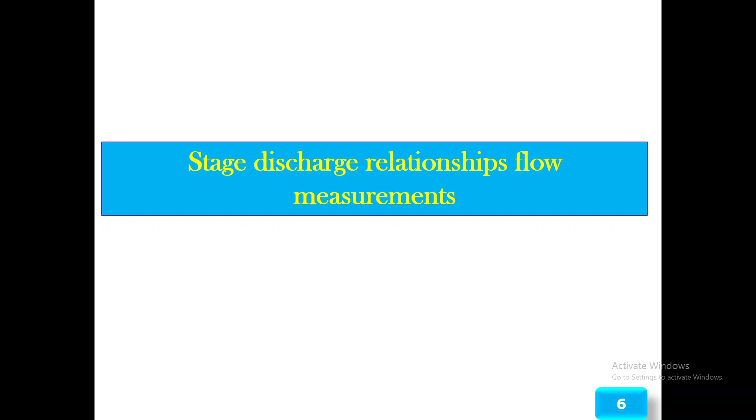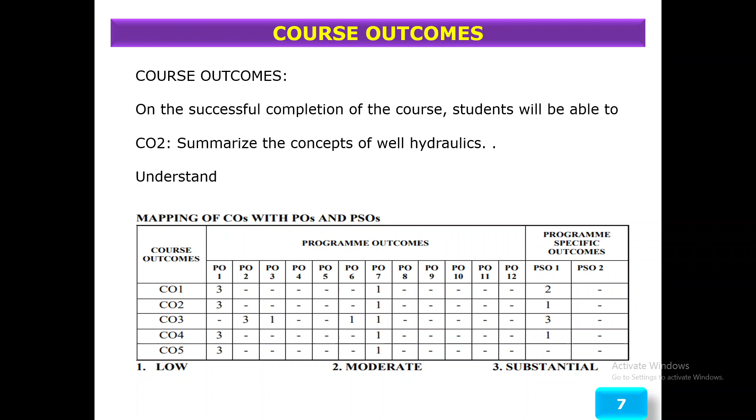Rainfall has an effect on stream flow, and hydraulics tends to measure the relationship between rainfall and stream flow. The aim of measuring stream flow is mainly establishing a stage discharge relationship.

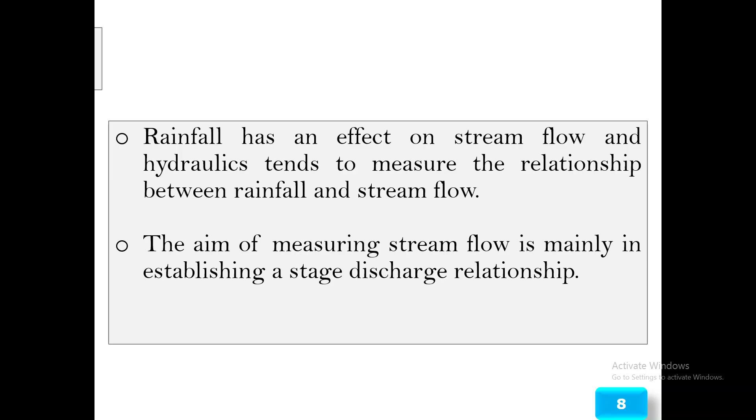Rainfall results in infiltration I, evaporation E and evapotranspiration ET, intercepted and depression storage, surface flow Q, and QG and interflow goes to the stream. The stream will flow in the channel and basin watershed. We can see water stage measurements and water surface elevation.

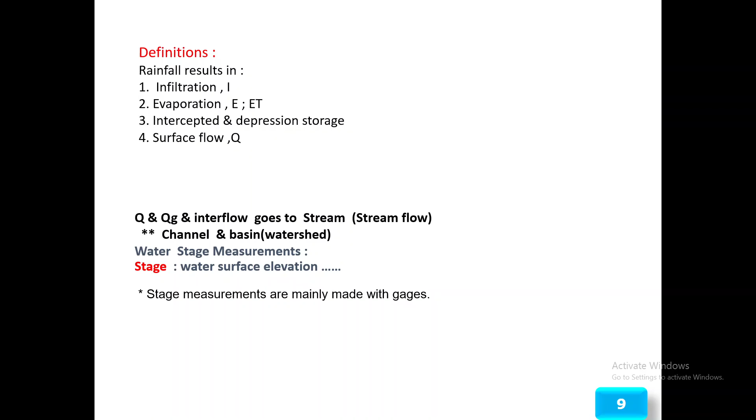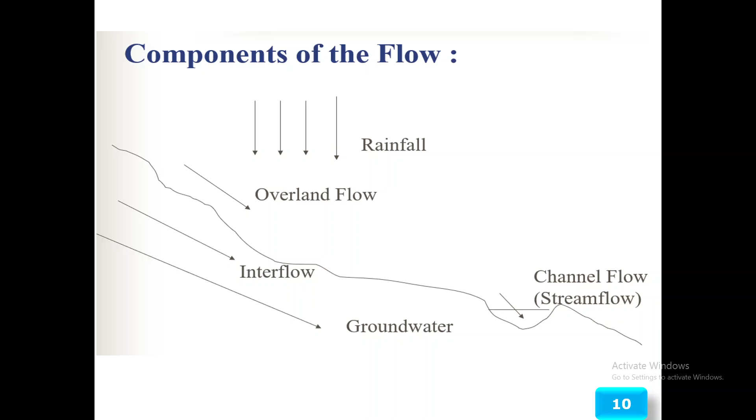Stage measurements are mainly made with gauges. The components of flow are rainfall, then overland flow and interflow, then groundwater, then channel flow in the stream.

The stage discharge relationship: the simultaneous measurement of stage and discharge provides a calibration graph known as stage discharge relation, or rating curve. The stage is the height of stream level measured from an arbitrary datum.

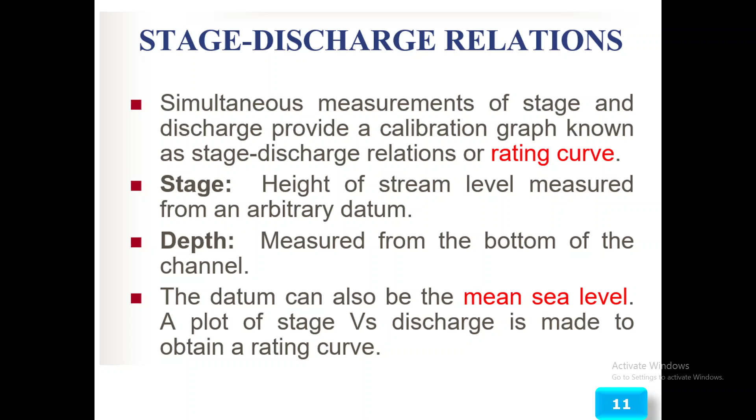The depth is measured from the bottom of the channel. The datum can also be the mean sea level. A plot of stage versus discharge is made to obtain a rating curve.

For the stage discharge relationship, the methods include non-recording stage gauges like staff, wire, string, crest gauges, and recording stream gauges like float type and digital gauges.

Manual gauges are non-recording stage gauges, such as sectional staff gauges - a series of posts, each overlapping, where the height above a certain datum is measured. The stage is usually related to height above mean sea level, MSL.

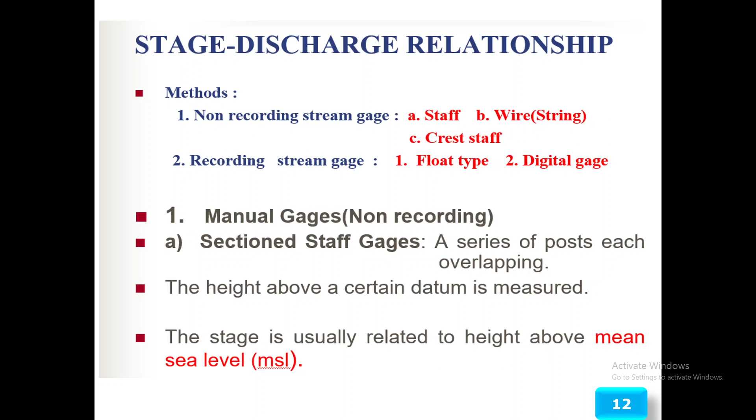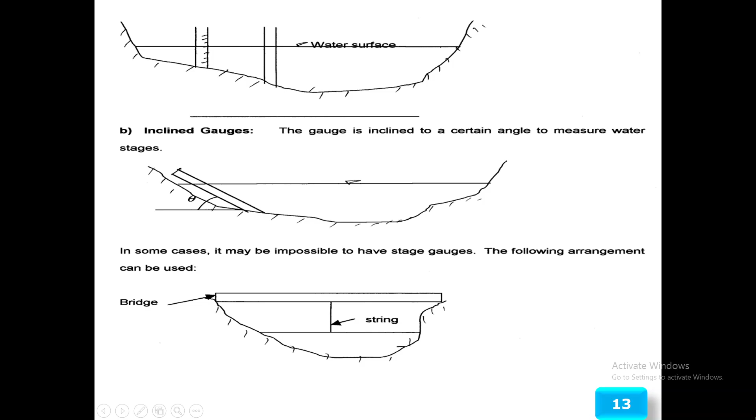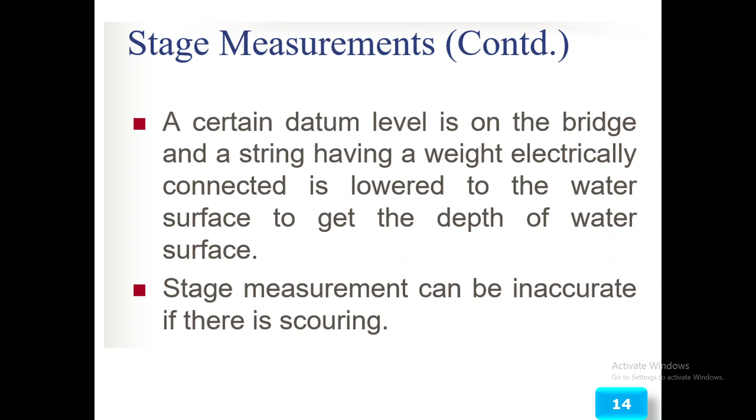The stage measurement can be inaccurate if there is scouring. So here are the rules guiding location of gauges: the gauge should not be located in rivers with scouring characteristics.

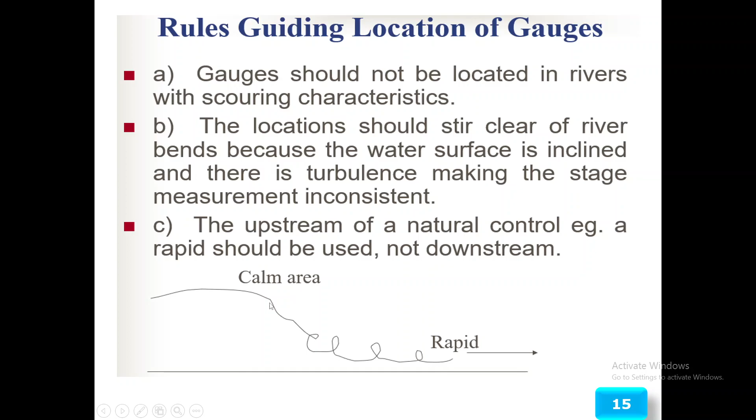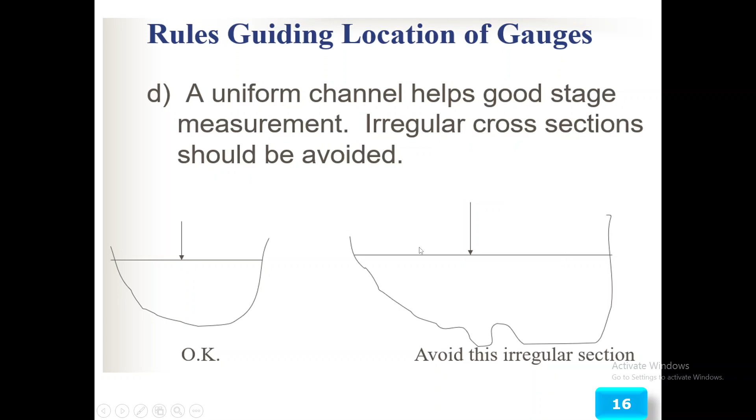Regarding rules guiding location of gauges: a uniform channel helps good stage measurement, whereas an irregular cross section should be avoided, because we cannot predict the exact area of flow stream at that stage.

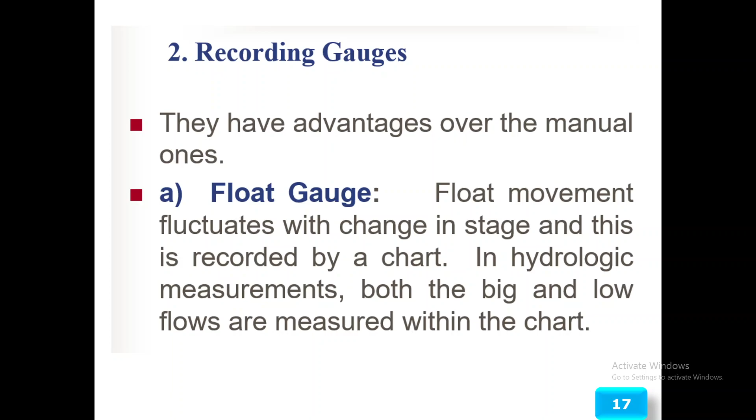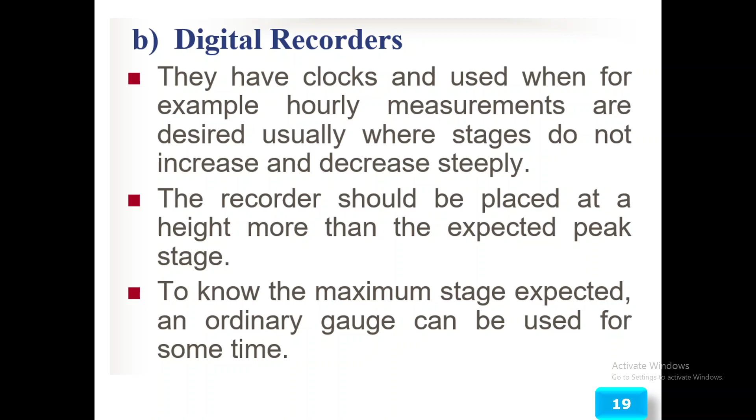The recorder should be placed at a height more than the expected peak stage. To know the maximum stage expected, an ordinary gauge can be used for some time.

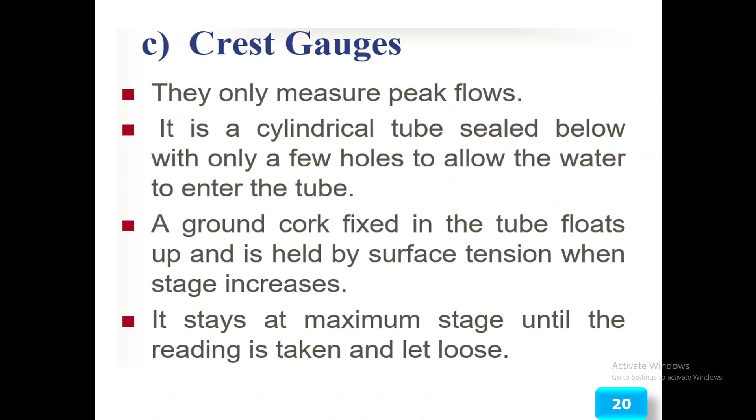The crest gauge only measures peak flow. It is a cylindrical tube sealed below with only a few holes to allow water to enter. A ground cork fixed in the tube floats up and is held by surface tension. When the stage increases, it stays at maximum stage until the reading is taken and let loose.

So this is the crest gauge - from here the gauge based reading we can measure the flow.

For discharge measurement, the current meter has a propeller which is rotated when water hits it, and is connected to magnets which actuates recorders when the propeller rotates.

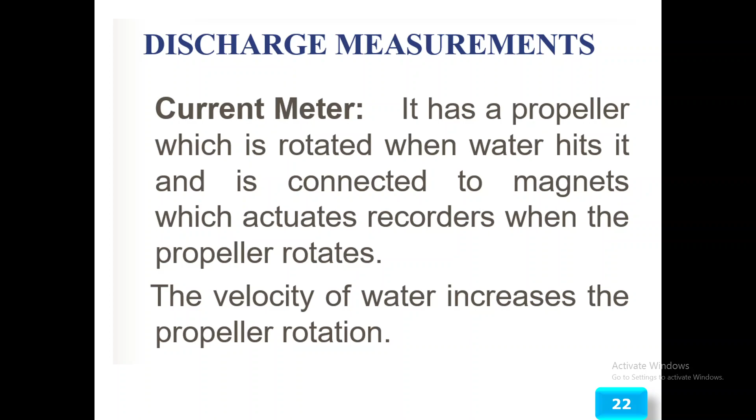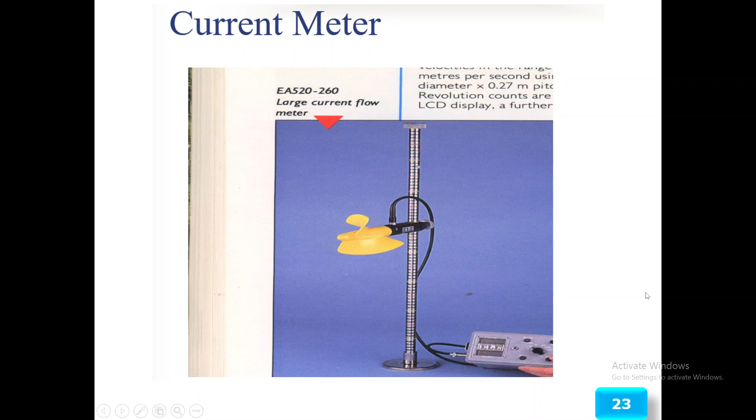The velocity of water increases the propeller rotation in the current meter. The meter, based on rotation, allows us to measure flow. The number of rotations are measured and correlated to velocity using the formula V equals A plus B into N, where N is the rotation of the propeller in revolutions per second (RPS).

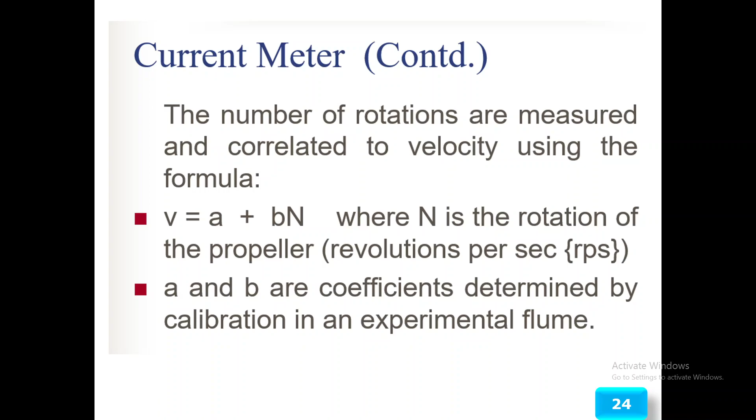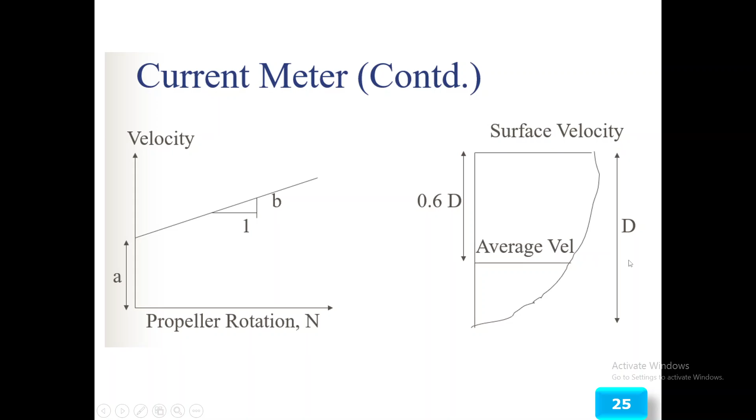A and B are coefficients determined by calibration in an experimental flume. The current meter gives velocity based on propeller rotation, the N value. This area rotates based on velocity, with surface velocity up to 0.6d, from which average velocity can be taken. This is the total depth d. Considering the velocity profile with depth, the average value of velocity can be obtained at 0.6 of the depth, that is V equals average velocity at about 0.6d.

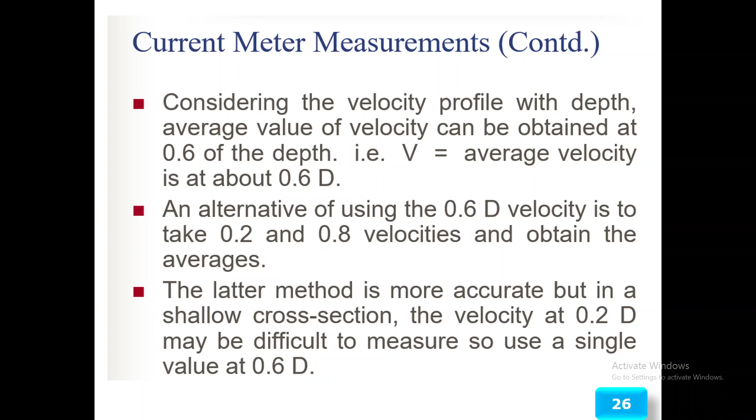An alternative to using the 0.6d velocity is to take the 0.2 and 0.8 velocities and obtain the average. This latter method is more accurate, but in a shallow cross section, the velocity at 0.2d may be difficult to measure, so use a single value at 0.6d instead.

The discharge measurement using the velocity-area method: Q equals V average into A, where V average equals V0.6 for a shallow stream with depth less than 3 meters. V average equals V0.8 plus V0.2 divided by 2 for a moderate stream, whereas for a deep stream like a flood flow, V average equals C into V0.5.

For velocity measurement of float, V average equals C into VF using the current meter, where V average equals A plus B into N. Q equals summation of Qi, which equals summation of Vi into Ai.

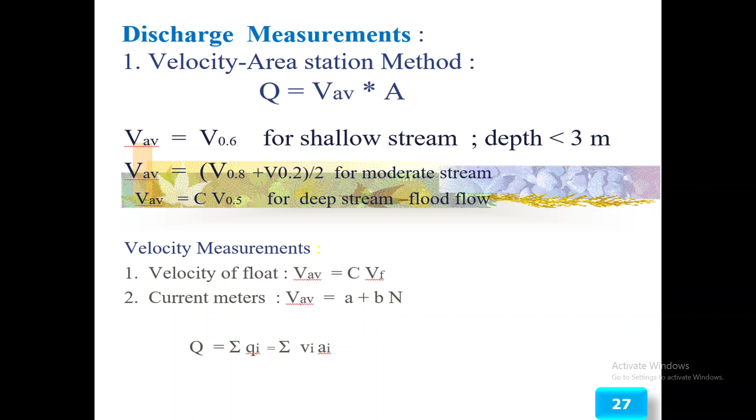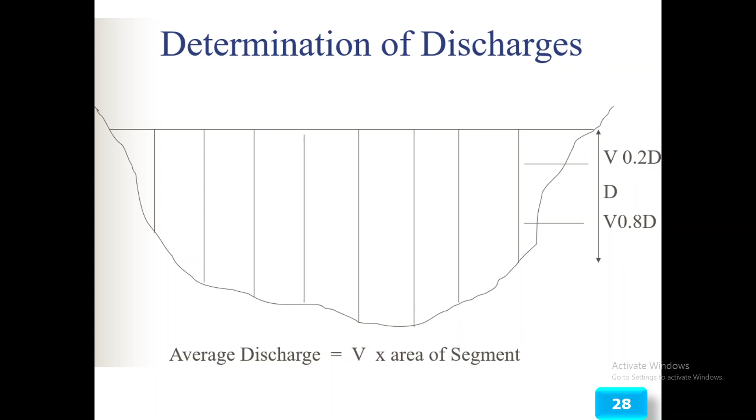Determination of discharge through velocity, such as V0.2d and V0.8d. The average discharge equals V into the area of the segment.

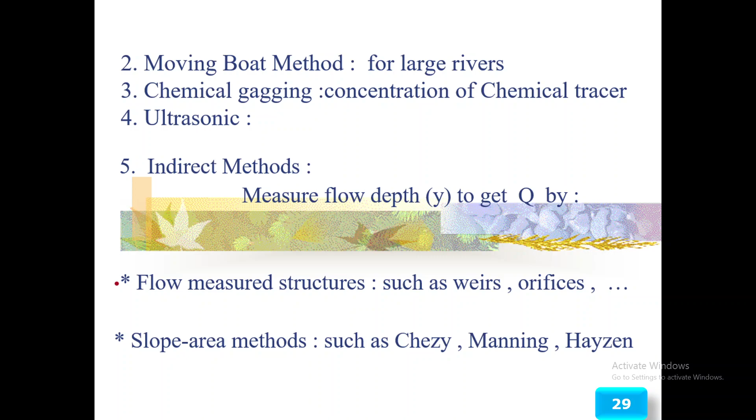Other methods include the moving boat method for large rivers, chemical gauging with concentration of chemical tracer, ultrasonic methods, and indirect methods like measuring flow depth Y to get Q through flow measuring structures such as weirs and orifices. Also the slope area method, such as Chezy, Manning, and Hazen formulas.

For measurement of discharge, first divide the cross section of the stream into vertical sections such that no section carries more than 10% of the total flow. Take soundings to determine various depths. The sections are of known width, so their discharge can be calculated if the velocities are taken along the 0.2d and 0.8d, or maybe along the 0.6d.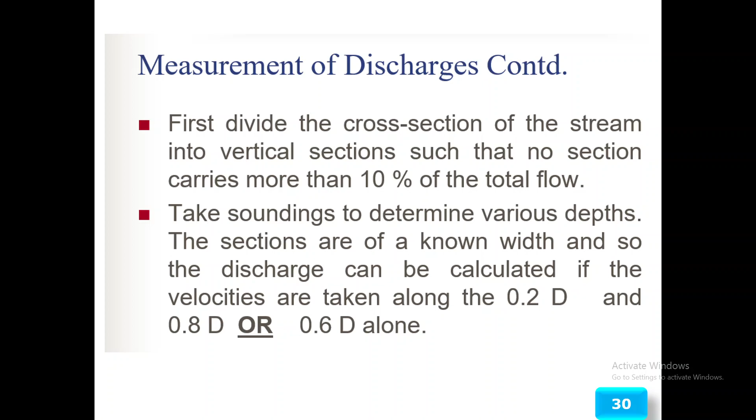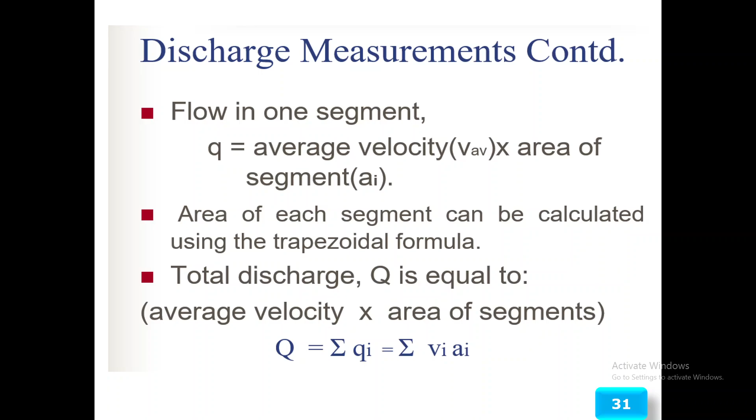The discharge measurement for flow in one segment: Q equals average velocity into area of segment. The area of each segment can be calculated using the trapezoidal formula. So the total discharge Q equals average velocity into area of segment, Q equals summation of Qi, which equals summation of Vi into Ai.

Discharge measurement using a float: any floatable substance, for example a tennis ball, is placed at a point, and the time t it takes to move a known distance is noted. Distance divided by time gives the average surface velocity of the water. The surface velocity equals 1.2 times the average velocity V, that is Vs equals 1.2V, and V equals 0.8 Vs. The cross-sectional area of flow is then multiplied by the average velocity to get the flow rate.

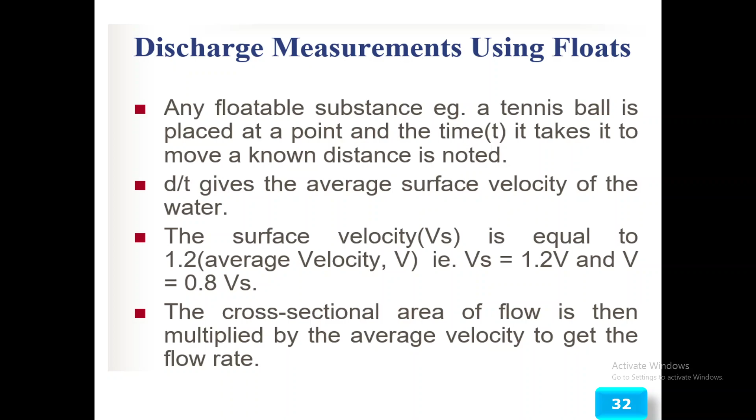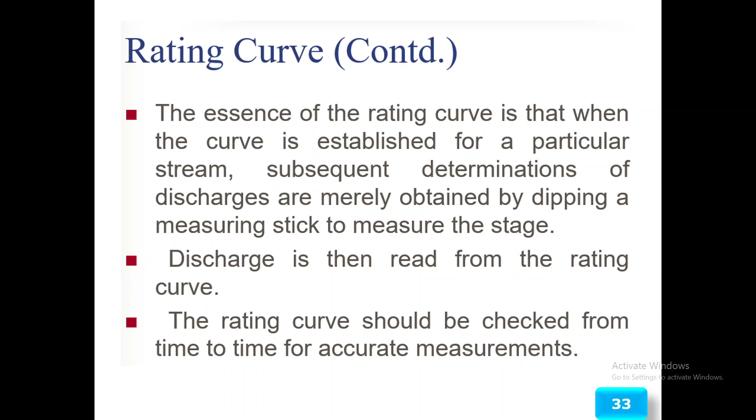Now the rating curve. The essence of the rating curve is that once it is established for a particular stream, subsequent determination of discharge is obtained merely by dipping a measuring stick to measure the stage. Discharge is then read from the rating curve. The rating curve should be checked from time to time for accurate measurement.

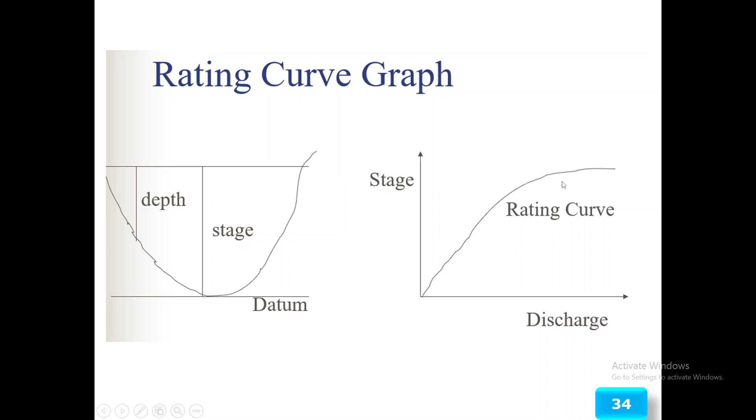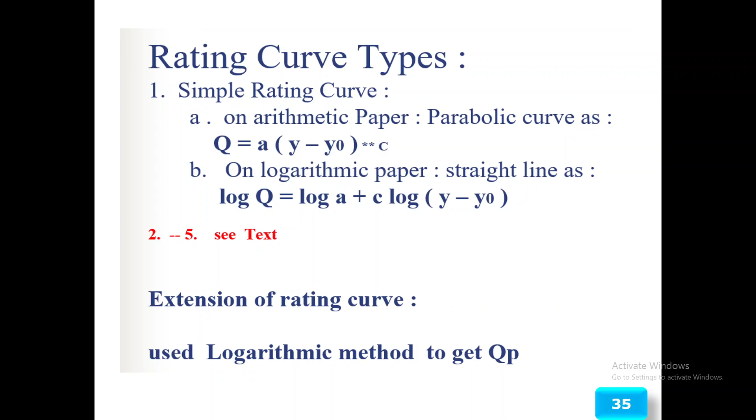Types of rating curves: the simple rating curve on arithmetic paper, like a parabolic curve, Q equals A into (Y minus Y naught) to the power C. On logarithmic paper, it's a straight line: log Q equals log A plus C into log (Y minus Y naught). Second, the extension of the rating curve uses the logarithmic method to get Qp. These are the reference materials.